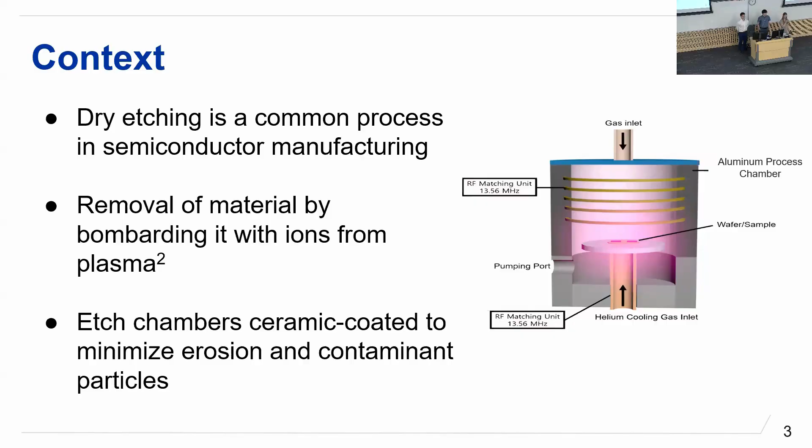A little bit of context: we're investigating coatings for the interior of dry etch chambers, and dry etching is a common process in semiconductor manufacturing that involves the removal of material by bombarding it with ions from plasma. These etch chambers are often ceramic coated to minimize erosion and the production of contaminant particles that can damage the wafers inside.

A common material being used today in these dry etch chambers is yttria. When yttria reacts with a fluorine-based plasma in these chambers, it creates a thin YOF layer, or yttrium oxyfluoride. With this interaction, YOF particles will fall off the coating and can contaminate the wafer inside, which is not desirable when you have these multi-billion dollar industries that rely on these wafers. So looking at a different perspective, we look at YOF as the coating itself. Since it already has fluorine in the system, it's more resistant to the fluorine plasma, and as a result produces fewer contaminants onto the wafers.

So how the process works is, let me use the pointer here so people on Zoom can see. Yeah, I think that works.

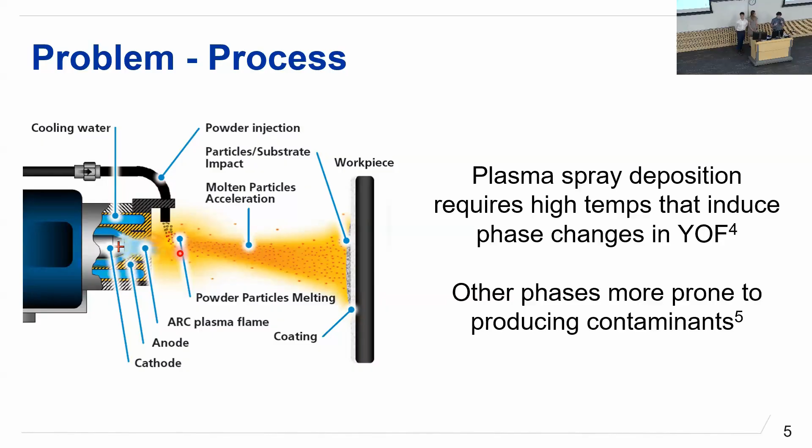So how this process works is that the current process today being used is plasma spray deposition. As yttrium particles are accelerated or injected into this plasma arc, it is then molten and hit onto the substrate, and then this solidifies and densifies onto the substrate. The issue with YOF is that this process is about 14,000 Kelvin, which is above the temperature for YOF, so it induces phase changes, and these phase changes are less desirable than just using yttria. So to actually use YOF, we have to look at a different process entirely.

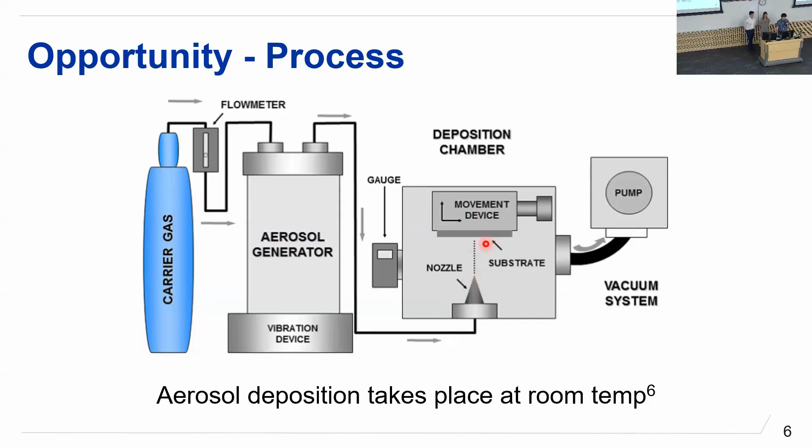This process that we use is called aerosol deposition, and it takes place at room temperature, so there should be no phase changes present. How it works is that a carrier gas, for us nitrogen, goes into where our powder is and aerosolizes our powder. That aerosolized powder is then accelerated, focused at the nozzle, and accelerated towards the substrate as the substrate moves on the XY axis and is programmable.

So how the process actually works is as the particle is accelerated at the substrate, as it hits the substrate, it will then hit and make this anchor layer by fracturing the moment it hits the substrate. Through this, it creates this anchor layer that's very dense and cohesive. Then as continual deposition occurs, it slowly creates a less dense layer, but it is still very cohesive.

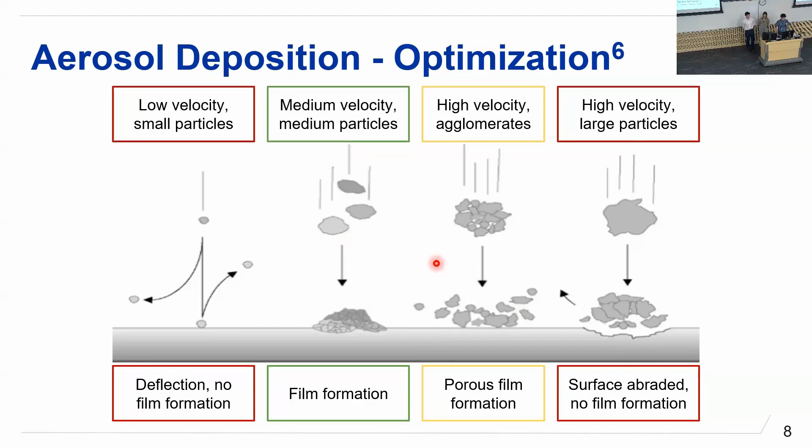What we want to see is right here, this green, where we have a medium velocity or medium particles. As the particles are accelerated towards the substrate, they hit, fracture, and densify on top of itself. If we have too high velocity or agglomerates, as they hit, they'll spread out more and create a more porous structure, which is not desirable for a protective coating. Too high velocity or large particles will just start to sandblast or abrade the surface, and no film will be deposited. On the other side, too low velocity or smaller particles, no film will actually be deposited onto the substrate.

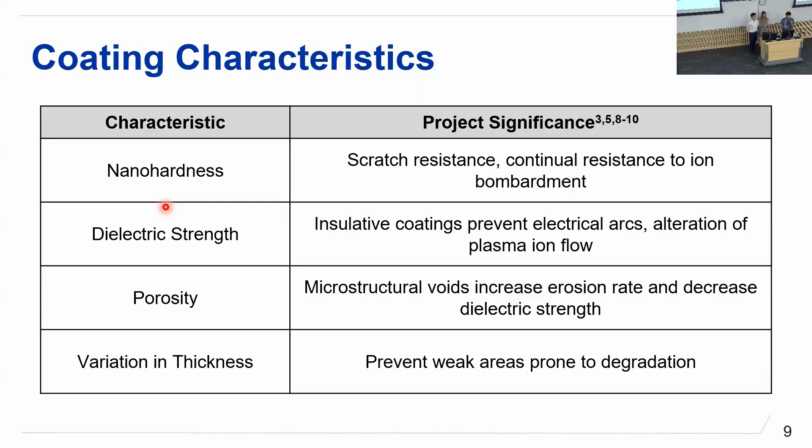The characteristics we want to look at are nanohardness, to see scratch resistance and resistance to ion bombardment, and dielectric strength, since in these dry etch chambers they have plasma ion flow, so we want to make sure it's electrically insulative to prevent electrical arcs occurring. As well as porosity, as I mentioned earlier, we want low porosity to have that green column, because porosity increases the erosion rate as well as decreases the dielectric strength, as well as having low variation in thickness, due to us wanting an even layer, being able to protect the material all the way across and having no weak points.

As Sam mentioned, NextEdge did sponsor a project last year, and so we're using that as a baseline, especially with their powder methodology. What we did, or what they did that we're using, is take the powder, ball mill it to reduce the particle size, separate using a sieve, and then bake out any moisture in the particles through the oven.

To begin the technical approach, we've made a roadmap to give some context. Firstly, we used DOE to create and implement our experimental plan to actually do the experiments. Secondly, we tested the responses of each experiment using various methodology. And thirdly and finally, we analyzed these responses to determine an optimized recipe.

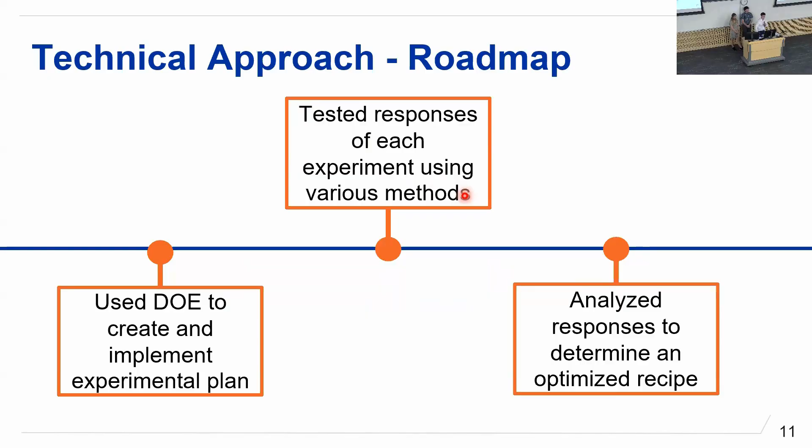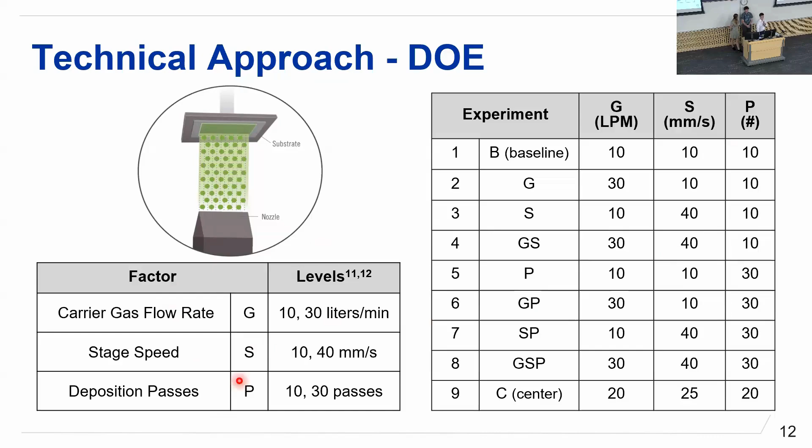So firstly, the DOE. We have a three-factor, two-level experiment where the first factor is carrier gas flow, represented by G in the table on the right. We had a low level of 10 liters per minute and a high level of 30 liters per minute. The second factor was stage speed, represented by S, with a low level of 10 millimeters per second and a high level of 40 millimeters per second. And thirdly, we had the factor of deposition passes, represented by P, which had a low level of 10 passes and a high level of 30 passes.

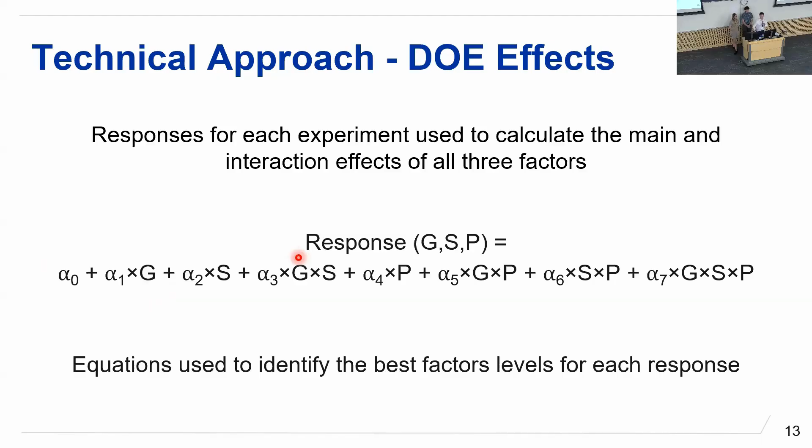So these effects - below is the really nasty looking equation. That is our general equation where we used our calculated responses to back out the effects, represented by alpha. We have 8 different effects. This is kind of just the under the hood of the DOE and what we actually did to develop and get our values.

So our responses that Connor laid the foundation on. To test nanohardness, we decided to do nano indentation through INL using a Berkovich diamond tip. Secondly, we tested the dielectric strength of the material using breakdown voltage testing to the ASTM standard D149-20. Thirdly, we tested the porosity of each spray or each experiment with a cross-sectional SEM image to the ASTM standard E2109-01. And finally, we tested the variation in thickness with the same cross-sectional SEM to the ASTM standard B487-24.

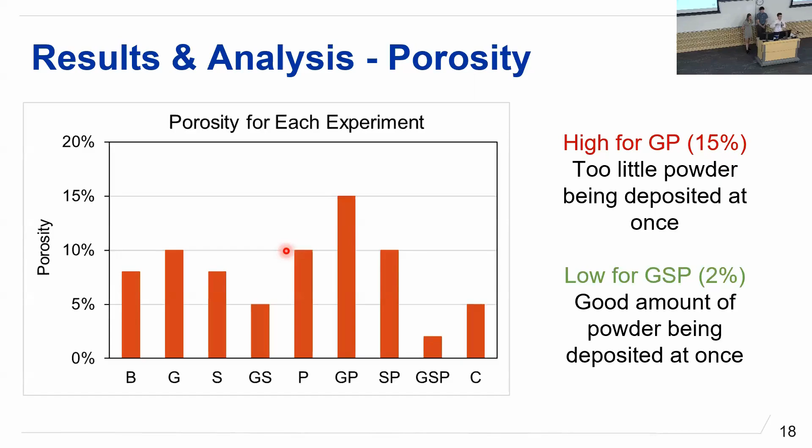Next, we have our porosity measurements. We found a very high porosity for experiment GP, and we attributed this to the fact that there was not enough powder being deposited at once. There wasn't enough exposure on any given area of substrate at some time, so it couldn't condense. We had a very low porosity for the same experiment GSP, and we found that there was enough exposure of the substrate to the nozzle so that the powder could condense and form that anchor layer.

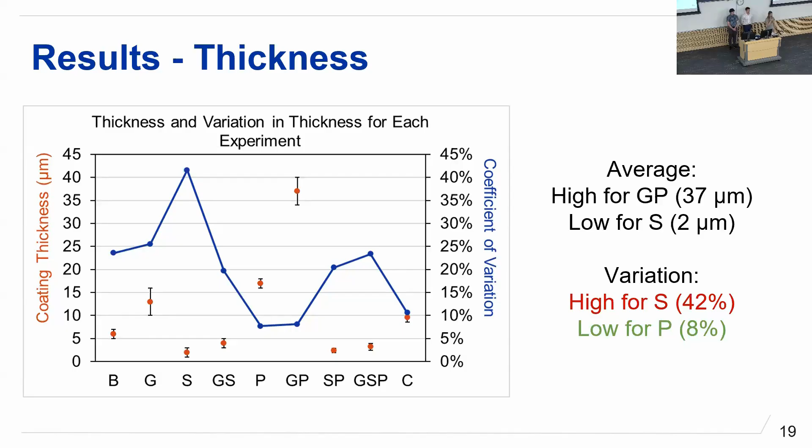We were also interested in the thickness of the coating. In the graph, the overall thickness with the standard deviation is represented by the orange dots, and the coefficient of variation is represented by the blue lines. We found that the coating with the highest thickness was for high gas flow rate and high passes, and the coating with the lowest thickness was for high stage speed. For variation, the highest was for stage speed, and it was lowest for the high number of deposition passes.

A little bit of analysis on this. We attributed the high thickness for the high gas flow rate and passes to a high enough particle velocity that adhesion is encouraged, and there are enough layers applied onto the coating that it levels out and makes it thick. We attributed the low thickness for high stage speed due to the small amount of powder being deposited on each area at one time per pass.

For variation in thickness, we attributed the high variation for stage speed to only the anchor layer being present, and the anchor layer tends to be uneven because as the particles hit the metal, it plastically deforms the metal as the particles fracture, making the surface uneven. We attributed the low variation in thickness for the high passes to the fact that as more layers are deposited on the substrate, it fills in voids on the surface to level out the coating.

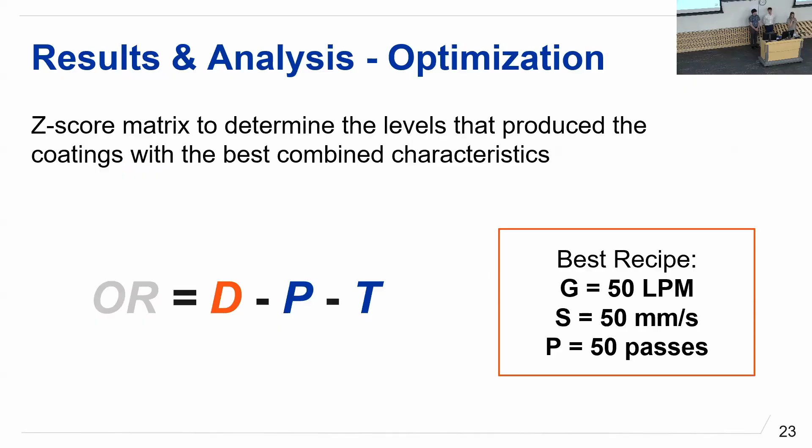So we wanted to optimize this recipe not just for each individual response, but also for the coating as a whole. We created a z-score matrix using these DOE parameters to determine the levels that produce the coatings with the best combined characteristics. We input those z-scores into the metrics shown below and determined that the best recipe was when gas flow was 50 liters per minute, stage speed was 50 millimeters per second, and the number of deposition passes was 50.

So a little bit of discussion. There were some errors in some of our methodology that we could have introduced. For breakdown voltage testing, we were only able to test one sample because breakdown voltage testing is a destructive process, so we couldn't actually test one coating multiple times. It's also known that the approximate dielectric strength of YOF should be around 25 kilovolts per millimeter, and some of the values we got were much higher than that, so there was something with our method that probably introduced some error.

For our SEM imaging, we also only cross-sectioned one sample, so there was not a lot of replicates there. For porosity, we only analyzed one cross-section per image, so it wasn't very representative of the whole sample.

We were not able to receive our nanohardness data in time for this presentation due to scheduling conflicts with our contact at INL, but that should be coming next week. And for the aerosol deposition equipment, there were some inconsistencies introduced if the nozzle was clogged or anything like that that we didn't notice when we were spraying, so sometimes the data we collected wasn't representative of just the factors we were changing, but other effects as well.

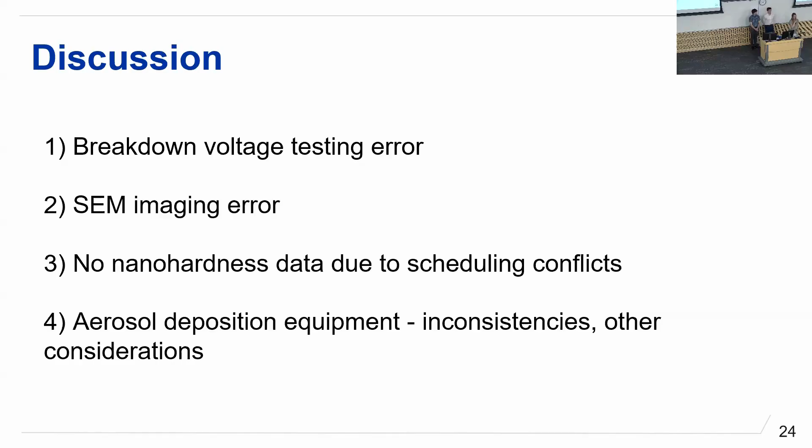We would also want to take into account some time and material cost considerations when determining an optimized recipe. For example, high passes takes more time, so that might not be worth it for the amount of dielectric strength they could introduce.

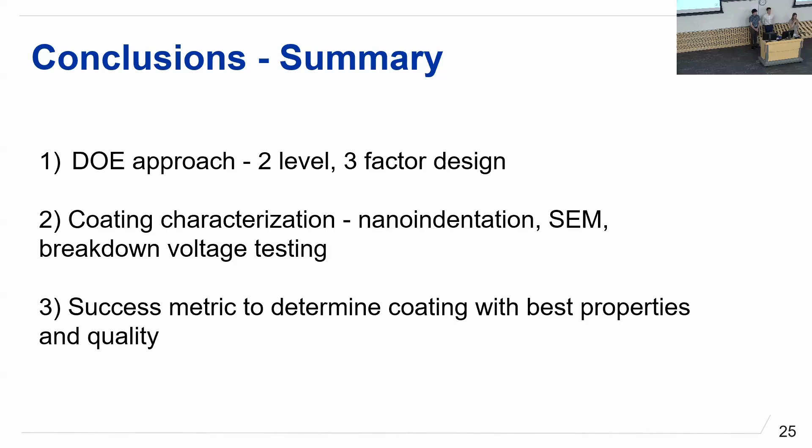So in conclusion, a summary of our project: we took a DOE approach with a 2-level 3-factor design to understand how 3 separate parameters affected an aerosol deposition process. We characterized the coatings produced using nano indentation, SEM, and breakdown voltage testing, and we input these values for the characterization into a success metric to determine the coating with the best properties and quality.

There are several directions we could take for future work. One would be to expand our DOE, test more levels to see if there are different effects that we didn't analyze. Other factors of interest include standoff distance, carrier gas species, and impact angle. Other responses of interest could be surface roughness or the etch rate of the coating in a fluorine environment.

We would also want to improve our SEM analysis, likely using image processing software to quantify our porosity rather than our eyes. We could carbon coat our sample before embedding it in resin, or use a conductive resin to improve the quality of our images. We'd also want to do powder particle size analysis to ensure that the particles we're using by our methodology are the correct size for this process.

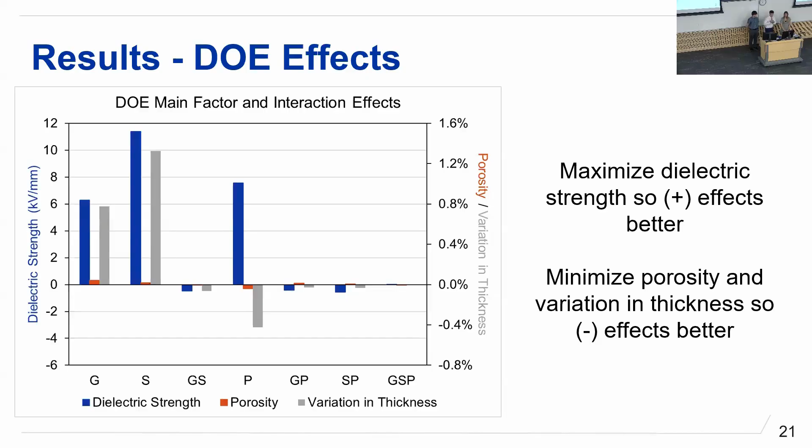Great presentation, guys. I may have missed this, but what were you looking for specifically qualitatively with some of your imaging, like the SEM? So the ASTM standard we used was actually a qualitative analysis of one image, which was the ASTM standard versus our image. So that's what was being referenced as the qualitative part, using our eyes. It's a visual ASTM standard, so it's not the most scientific, but it is an ASTM standard that we follow. Cool, yeah, I was just curious. Thank you.

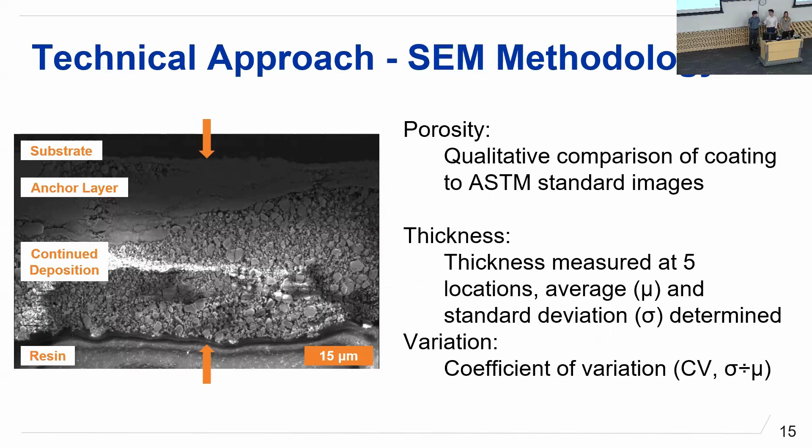All right, good job guys. Quick question: were all your coatings the same thickness? No, our coatings did have a variation in thickness throughout. That's just due to the different amount of passes resulting in different thickness between the different samples. Do you think it would be worthwhile to normalize some of your results based on coating thickness? I think that would be something great to look into. That definitely could give us more accurate data for selecting the best overall coating, but that was just something we didn't end up looking at. That's a great idea because we didn't consider that.

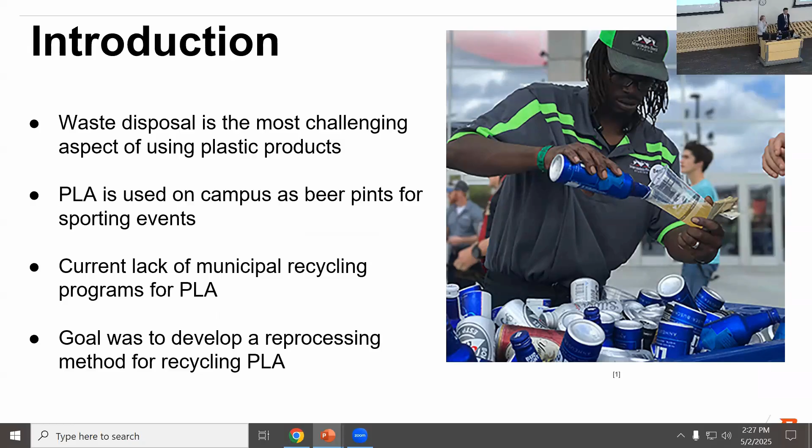A little bit of background on PLA: it starts by being synthesized through the fermentation of plant starch to form lactic acid. In the States, it's most commonly corn. In other areas like Southeast Asia, sugar cane gets you your most abundant yield.

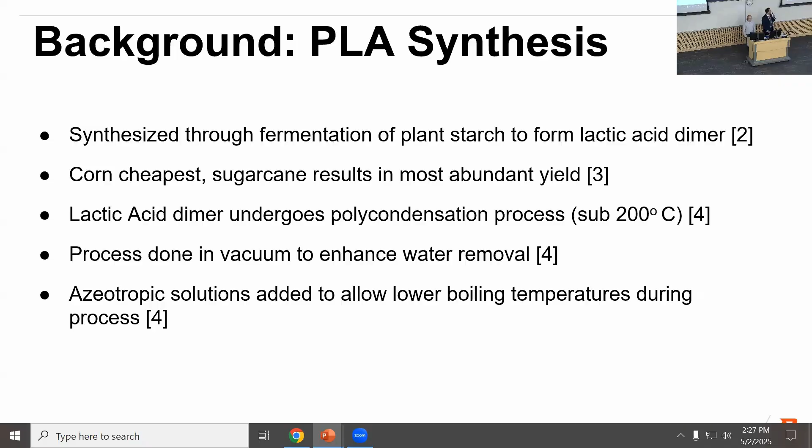This lactic acid dimer then undergoes a polycondensation process at temperatures below 200 degrees Celsius. This is also done with the presence of an azeotrope and in a vacuum, both of which further enhance the water removal.

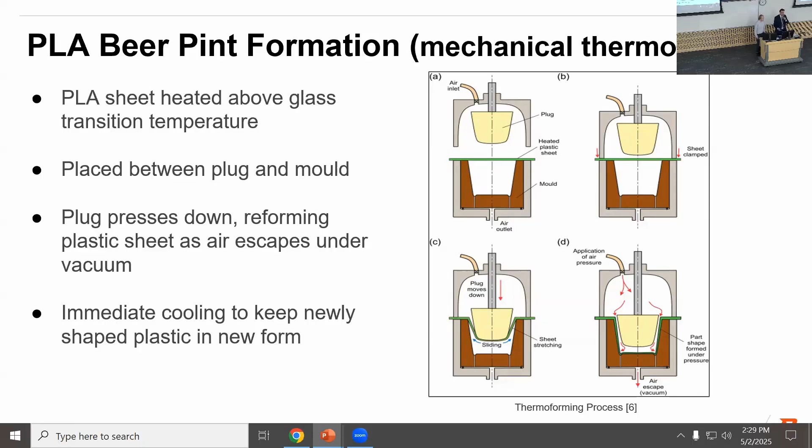The actual beer pints you've probably seen at Extra Mile Arena before are formed with a process called mechanical thermoforming. A sheet of PLA is taken above its glass transition temperature, placed between a plug and a mold part, and then the plug goes down as air is released to allow for cooling and solidification of this heated PLA in the newly formed pint mold. It's immediately sectioned off through machinery to mass produce it.

Plastic extrusion was the name of the game for our project. We dealt a lot with it, and I'm just going to take you through some of the basics. It starts by taking plastic feedstock and putting it into a hopper, and then a screw on the bottom pushes the plastic through a series of heaters.

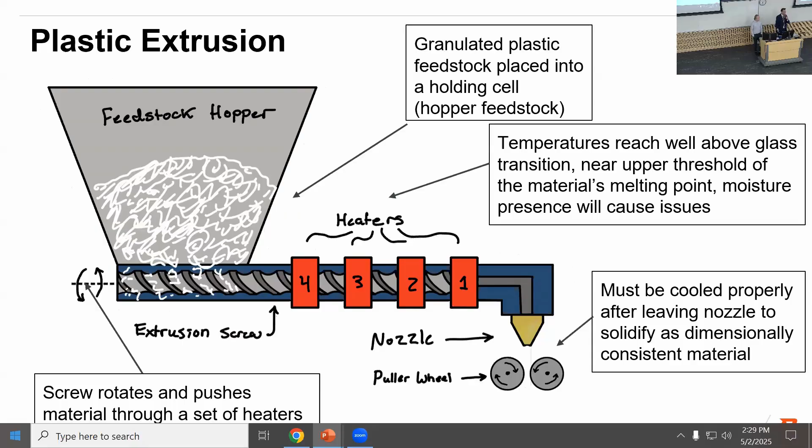These heaters must take the material above the glass transition and to the upper threshold of the melting temperature, so it's in a molten state. This is a part where you really do not want any excess moisture, as any moisture will likely boil, pop, and cause the integrity of your filament to be weakened. On top of this, there must be a proper cooling method between the extrusion at the nozzle and the pull wheel so that it's not flattened by the pull wheel when it gets there.

PLA has really beneficial properties for making it easy to extrude. It was compared with ABS, PET, and PETG, three other common thermoplastics used for 3D printing. The melting point, processing temp, and extrusion temperature for PLA are lower than all of them, which is good for how easy it is to extrude. It takes less time to heat up your extruder and is just more energy efficient.

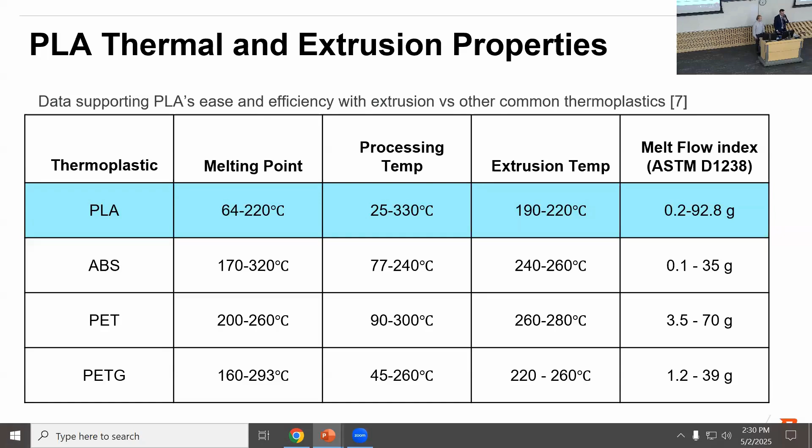On top of that, it has a much higher melt flow index than these other thermoplastics. This essentially means you can get a lot more weight of this polymer extruded in a shorter amount of time, more energy efficient for us, which is the name of the game. Unfortunately, it does also have some negative aspects, specifically with water content. It has the ability to uptake up to 2.4% water, and it has a resting equilibrium moisture content up to 2%. Both of these values are double the next closest one, so PLA does struggle in this regard.

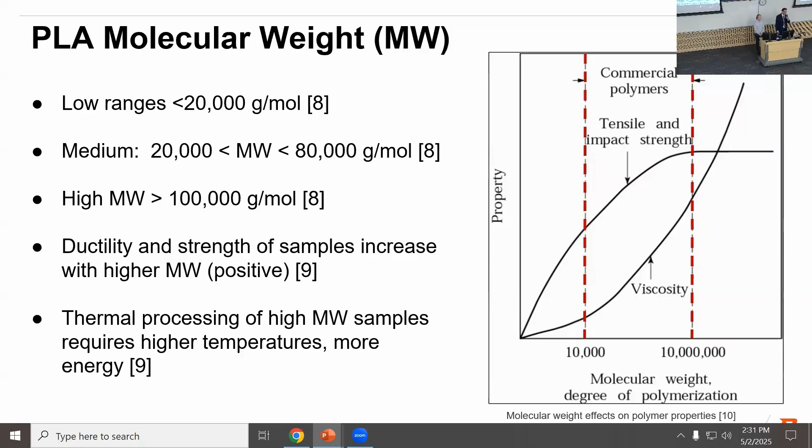It also has a very large range of molecular weight, with lower weight samples being below 20,000 grams per mole and higher ones well exceeding 100,000 grams per mole. This means there's a wide range of temperatures that can be worked with and a large range of mechanical properties it will take. The higher the molecular weight, the stronger it usually is, the longer the polymer chains, meaning more bonds that need to be broken in order to be deformed or impacted. So that is a good thing, but unfortunately, it also means it must be worked with at a higher temperature in order to properly get it into a molten state.

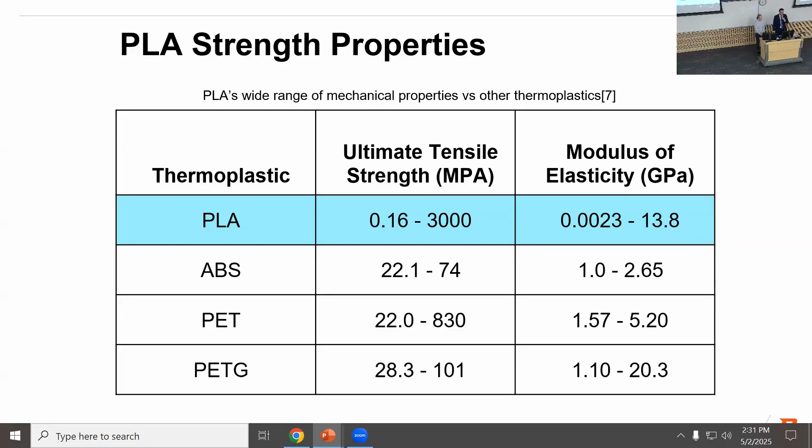This can be seen by this graph right here. The ultimate tensile strengths for PLA show a very wide range - 0.16 to 3,000 is more than triple the next closest range. And the modulus of elasticity is also a lot larger, with the exception of PETG being somewhat comparable.

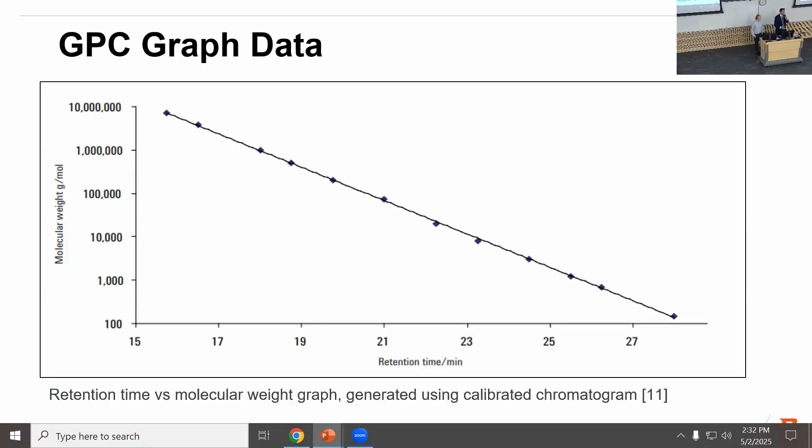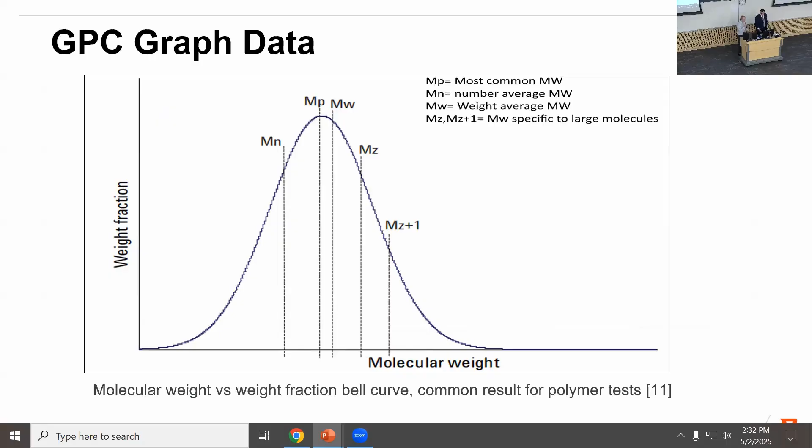This figure is a very idealized version. It's usually not going to be this linear, but you should see a negative correlation between retention time and molecular weight, with the highest retention times being the smallest molecular weights of the sample. So basically you would expect a normal distribution similar to this, which can tell you how many of what size molecular weight is part of your plastic.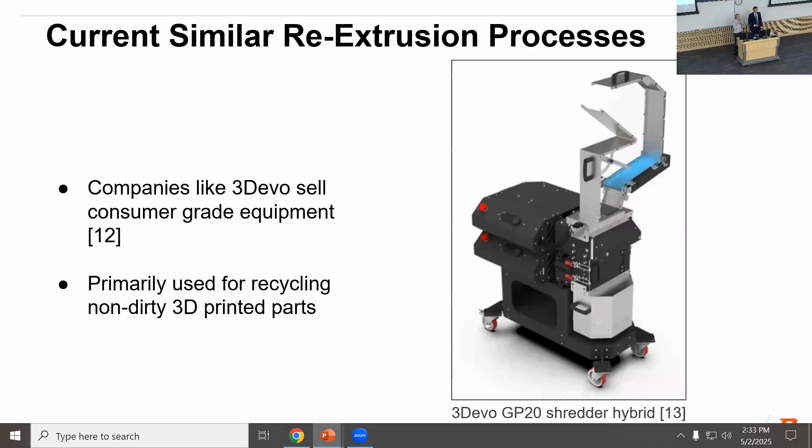Some current similar re-extrusion processes that are out there are done by companies like 3D Evo or 3Devo, I don't know how to pronounce it. They sell equipment like shredders, granulators, and extruders that are consumer grade, so people can do this at home. The difference though is that they are typically recycling old 3D printed parts or broken parts, not this thin plastic cup material that we're working with.

So our goal is to establish a repeatable process to produce this quality 3D printing filament from those cups. This starts by acquiring our material, sectioning it into smaller pieces, shredding, granulating, and then finally extruding it into a filament. Once we have that filament, we're able to produce some 3D printed parts, and we can mechanically test the filament and the parts.

For acquiring the material, we got in contact with Extra Mile Arena, a team over there called Pints to Prints. They donated some PLA beer cups for us to use. That's the picture on the left or on the right there. It's kind of dirty cups.

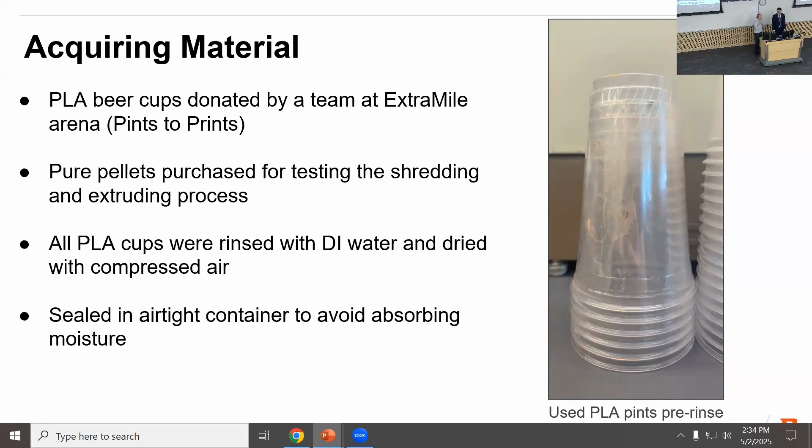We also purchased some pure PLA pellets called Eolas brand pellets online. We used that to test our shredding and extruding processes. All the cups that we received were washed with deionized water, no soap or anything, and dried with compressed air, and then finally stored in an airtight container so we can avoid moisture contamination.

So initially, we tried getting these section cups and placing them directly within the Filabot Reclaimer, which was the shredder that we used. Unfortunately, what we found was that the plastic cups were way too flexible and thin and just sort of gummed up around the teeth of the shredder and didn't process properly.

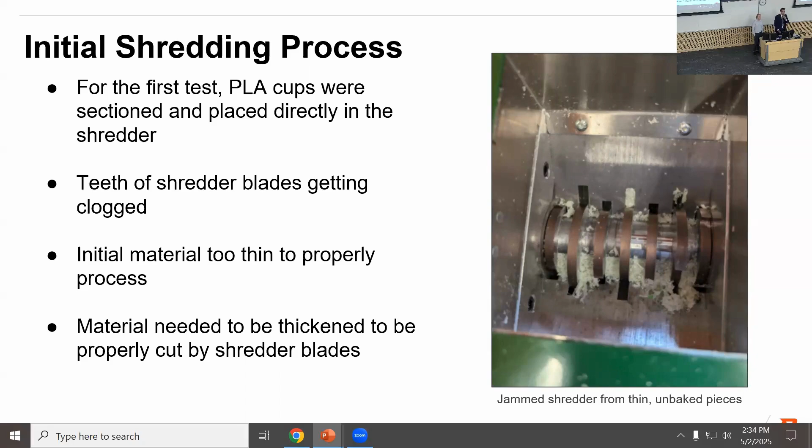So we knew that going forward, we would need to somehow treat this material to either embrittle it or harden it or just make it more able to be cut properly by the teeth. So we decided to research the benefits of thermally treating it. And what we wanted to do was essentially heat it up well above the glass transition temperature of PLA.

Now, when we do this, the amorphous regions of PLA, which is the majority of PLA, typically around 90% of PLA is amorphous, allows these regions to have the polymer chains untangle, and then upon cooling, as you can see in the graph, it becomes more solidified in a crystalline manner upon cooling. And that decreases the specific volume and consequently increases the hardness and brittleness.

And at the same time, it also lowers the moisture content, which, as we discussed earlier, is something you want to try to do.

So we applied this to our shredding and processing optimization by thermally treating our cups. After sectioning them into smaller pieces, we weighed out about 150 to 200 gram batches onto metal trays and baked them for 1 hour at 150 Celsius. They're weighed before and after so we can see how much water we lost.

And so this is the result of that. We found that the highest amount of water that all of our samples had was 1.45%, which is well within the industry standards for PLA, which goes between 0.01 all the way up to 2%.

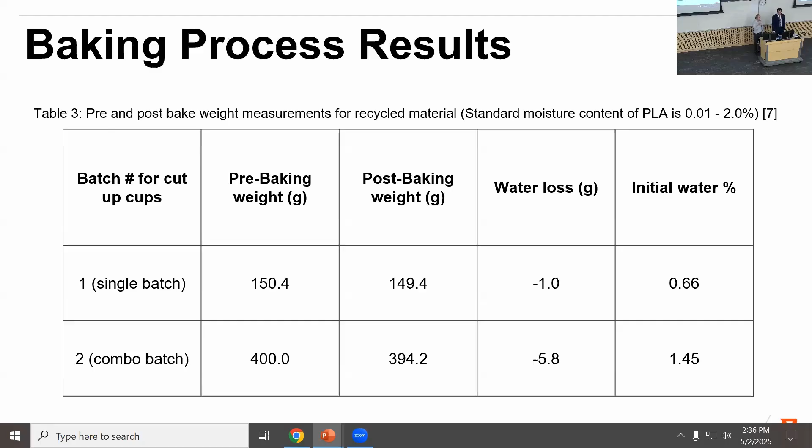So to start our extrusion process, we started with the purchased material that we got, the EOLAS filament, and we were using the Composer 350 made by 3Devo, as shown there. We used the default parameters that came with the machine for 1.75 millimeter filament.

This did not turn out super well. We had some non-uniform extrusion diameters and the filament was just unusable. To help us with this process, we downloaded software called Devovision that 3Devo offered, and this tracked the diameter of the filament in real time.

And once we did this, we set some higher and lower limits, about 1.8 to 1.7 millimeters. This was actually a stricter tolerance than the default for DevoVision when you first download it. So we allowed ourselves a bit of leeway if it went a little bit above or a little bit below.

And essentially, we just adjusted the heaters and the speeds of the screw and the puller to get to a point where we were consistently producing filament that was 1.75 millimeter diameter, and all the parameters were in check.

And going forward, this set of parameters was used for all the new waste material. This image that you can see on your right is about a 33-minute window of proper extrusion. So we spent a lot of time doing this, months trying to get all these parameters correct.

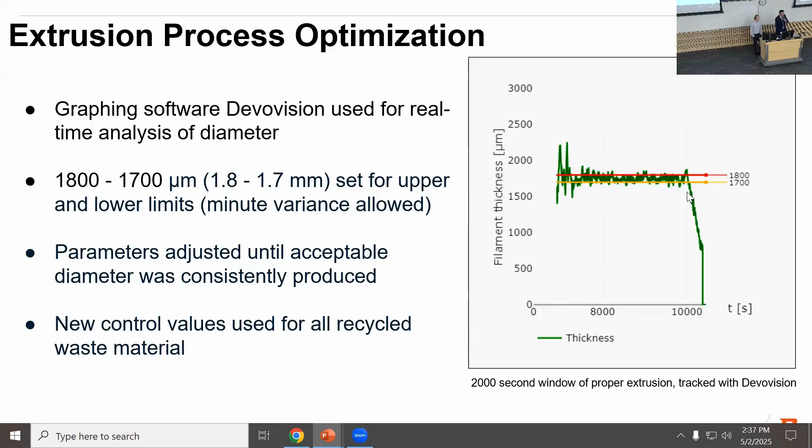There's also an extrusion screw that has a set RPM, or that we can determine. And then the puller wheels at the end, those are able to be set as well.

So the main thing that we changed, though, was the temperatures, as we found that the material was just not melting very well. So we decided to go up to about 200 degrees, closer to the actual nozzle.

So once we were able to finally produce some filament that was within the diameter that we wanted, we created 5 samples of both the purchased material and our recycled material for tensile testing. We also 3D printed some specimens known as dog bones that are used for tensile testing. We did 5 of each of those in both materials.

And we used the ASTM D638-22 engineering standard for testing the polymers at a rate of 5 millimeters per minute.

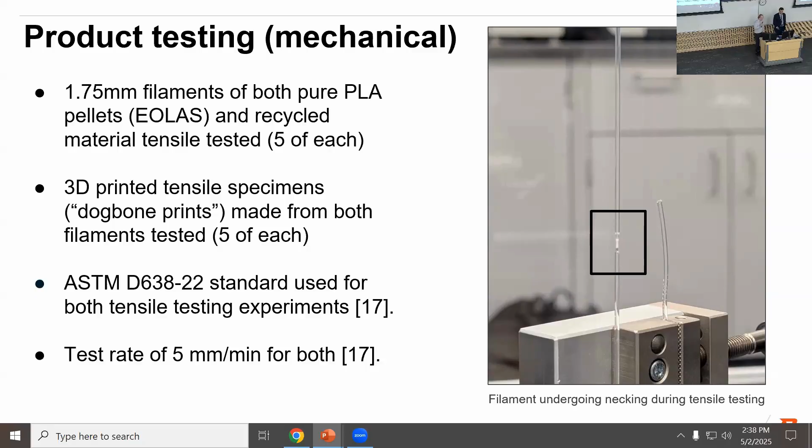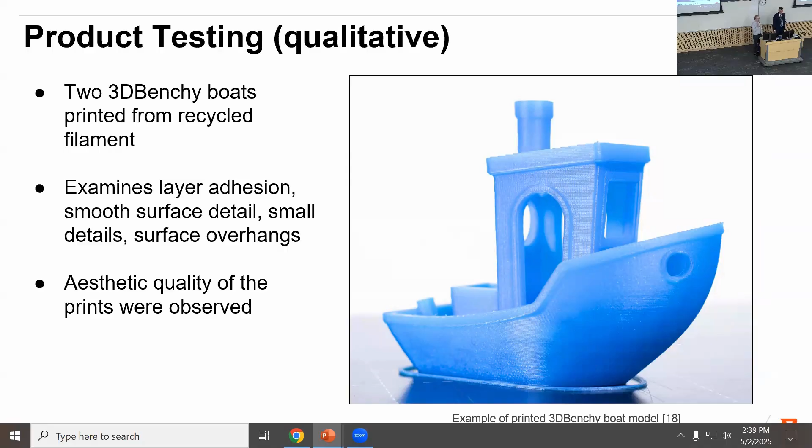So as for the qualitative analysis of our filament, we decided to go with this model of a 3D benchy boat. It's a little tugboat that has a lot of different details on it that are useful for examining things like overhangs, small holes, how smooth the surface is, and overall aesthetic qualities.

By calculating all of these values and individually charting them for the five, we were able to get an average and a standard deviation, just to see how strong they are and how consistent the data was. What we found was that in general for the dog bone, the highest standard deviation was 1.69, not that high, pretty consistent data. The recycled dog bones far outperformed the pure EOLAS pellet dog bones by over a magnitude of 2.

On top of that, the filament for the recycled material was also better than the pure EOLAS pellet filament, and it had a smaller standard deviation, meaning we were able to produce more consistent data. Our recycled filament, made from the beer pints, came in around 55 megapascals, slightly below the industry standard of 65 megapascals for 1.75 millimeter PLA filament available commercially. But our recycled filament could be used comparably with ASA filament and is stronger than PETG and ABS filament based on their standards.

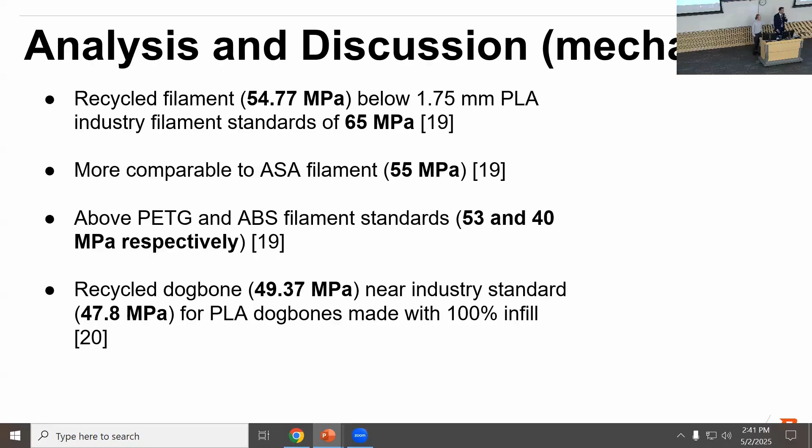I was able to clip that and print a second boat pretty much flawlessly, aside from a little bit of stringing. So yeah, that's very successful.

In conclusion, this PLA can definitely be recycled and repurposed into new products. It exceeds our expectations for strength and other properties, and it can be trusted to produce aesthetic parts. The only downside is that the material needs to be thermally treated before shredding to avoid clogging.

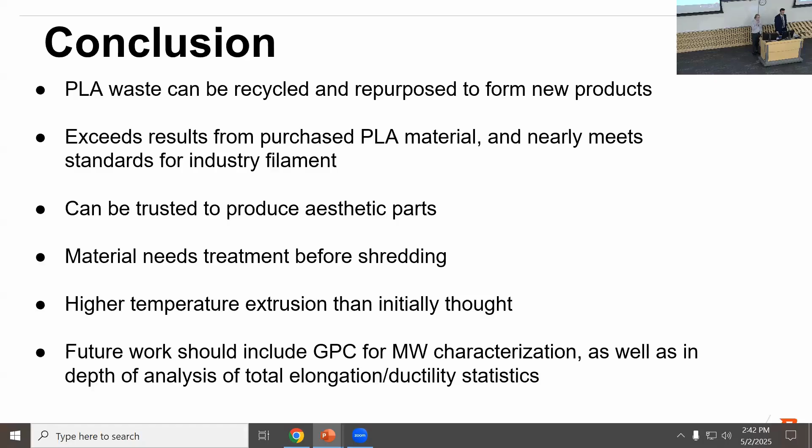For teams in the future hoping to do this project, we definitely recommend using the higher temperatures that we went with, as well as diving further into molecular weight characterization using GPC. We didn't have enough time in our project to cover that, but we would have liked to see those results, as well as a more in-depth analysis of the elongation and ductility of the materials.

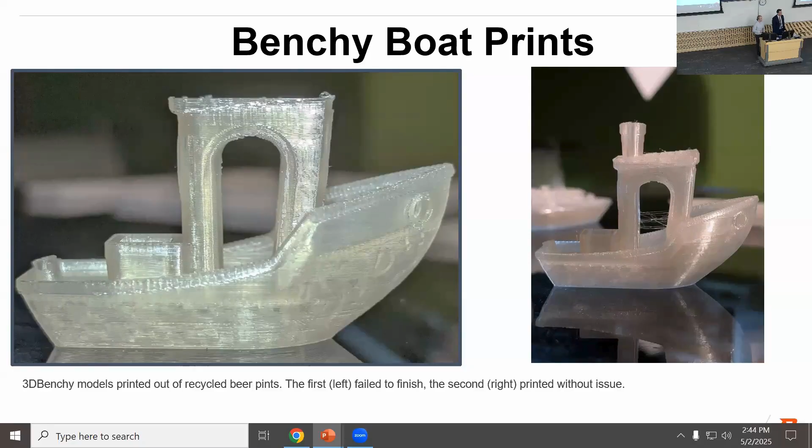So before putting the shredded pieces into the extruder, you did the thermal processing, heating it up and then cooling it down. The argument there is that by heating it up close to the melting temperature, after cooling down, we've got a crystalline polymer that's more brittle. Does it matter if you just cool it down enough? Can you process in a cold room, or how much did heating up and cooling down help with the processing?

It was required to embrittle the material. As far as heating it up, we started out knowing we wanted to exceed the glass transition. The 150 degrees Celsius was actually just the first number we went with, and it really worked for us. As far as cooling, we just let it sit over a duration of about a day. We typically worked with the materials a day after they finished baking. We didn't put them in an actual colder than room temperature environment.

Nice work, good job. It looks like you have hit all the standards and properties you would like to hit. When you think about this as a successful process, how does it compare on the economic side? Did you estimate how much it would cost to process and recycle this compared to anything new? So that's another thing, the cost analysis. I would recommend putting another team on that in the future. There's a lot that needs to be developed. The team at Extra Mile actually intends to get a larger shredder and a better extruder purely for these cups, so if they were to do that, there'd be quite a big budget for that. But overall, processing the material wouldn't be super expensive, I would think.

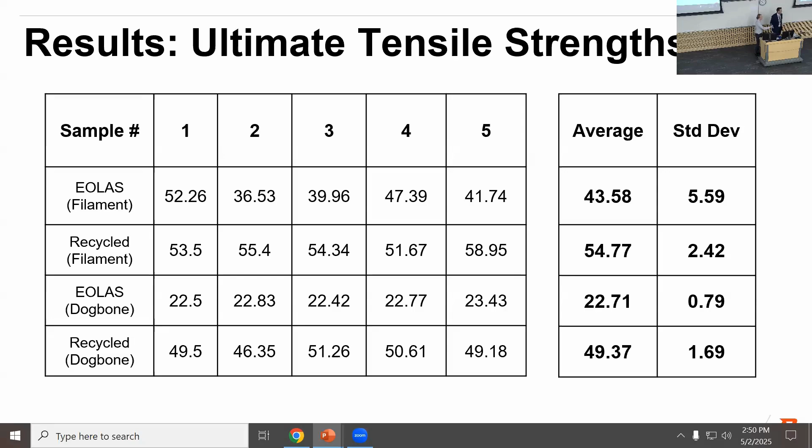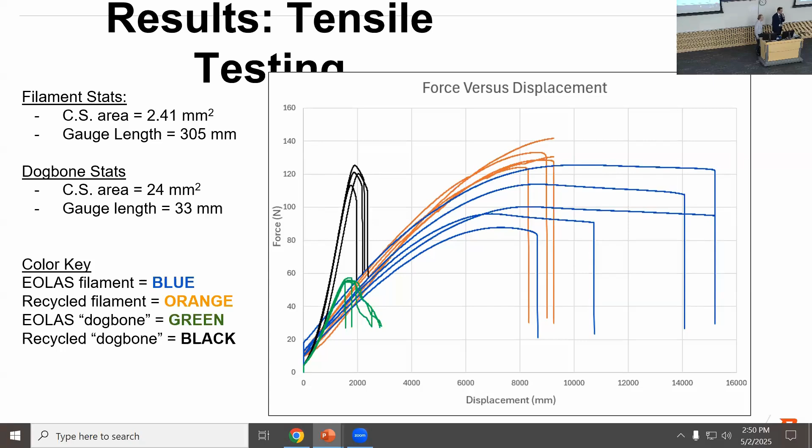Our project was determining gas behavior in ultra-high vacuum environments for atomic layer deposition applications. Our sponsor was Micron Technology, a major company within the semiconductor industry known for their computer memory and data storage solutions. Our sponsor from Micron was Dan Markowitz, who is an MTS pathfinding lead in Micron's corporate labs. Our faculty advisor was Dr. Stephen Hughes, who is a Cohen affiliate faculty, meaning he supports research here at Boise State while also corresponding with teams over at Micron.

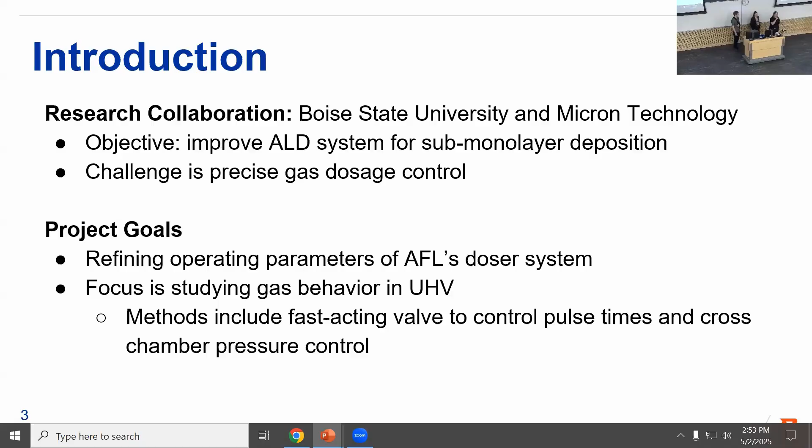Our project stems from a research collaboration between Boise State University's Atomic Films Lab and Micron Technology. The overall objective was to improve the current ALD system in the AFL for submonolayer deposition. The challenge with this was precise gas dosage. Therefore, our main goal was to refine the operating parameters of the AFL's doser system by focusing on studying gas behavior in ultra-high vacuum environments. Some methods include using a fast-acting valve to control pulse time and controlling cross-chamber pressure.

So our project is more so looking to enable submonolayer ALD, which means an incomplete monolayer is formed on the surface of the substrate, as we can see in image A, compared to the fully deposited substrates in images B and C. Submonolayer ALD requires extremely small amounts of gas being inputted into the main chamber, which is why we were looking at ultra-high vacuum environments for this. It's important for research as it better reveals the reaction mechanisms behind ALD, allowing for better comparison to computational studies which involve one to few molecules interacting with a small portion of the substrate.

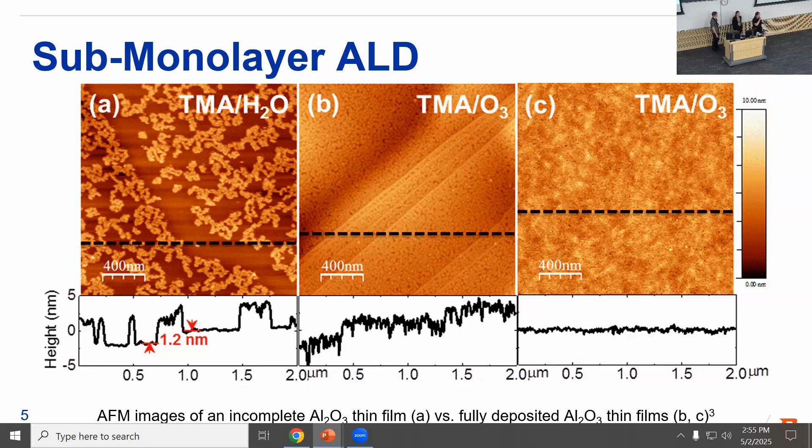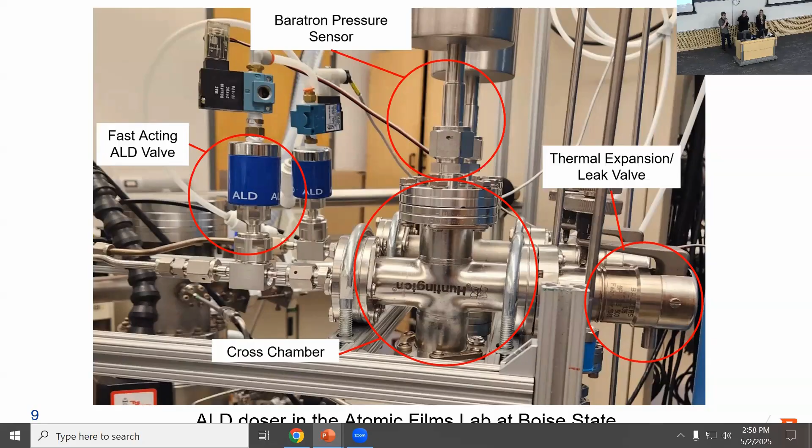So here's another schematic of our system. We've got the cross chamber and the main chamber. Before the cross chamber is filled with nitrogen, it is evacuated, so there's no air contaminating it—it's just pure nitrogen. This is in the millitorr range, so we can use the Baratron pressure sensor, which is an electromechanical system. Because we're not in ultra-high vacuum yet, we can use a much simpler pressure sensor.

But in the main chamber, this is ultra-high vacuum, so we use an RGA pressure sensor. This is a residual gas analyzer—basically just a small mass spectrometer. It ionizes the gas, then counts the number of nitrogen molecules based on their mass. So a small amount of that nitrogen will flow through the fast-acting ALD valve into the main system, and then we'll analyze the pressure difference.

So our whole process is based on these 2 operating parameters and how they affect the gas dosage. We have the pressure within the cross chamber, which we varied between 0.05 and 5 millitorr, based on the Baratron pressure sensor—this is the range that worked with it on top of that cross chamber.

We also have the ALD valve timing, or the pulse time, which we varied between 5 and 1,000 milliseconds. We went down to 5 milliseconds because that's the operating limit for the ALD valve we used—it can only open and close so quickly. Our original hypothesis was that as we got to that extremely low pulse time, reaching the limits of that valve, we would get low precision due to mechanical inconsistencies within the valve when it's nearing the limits of its specs.

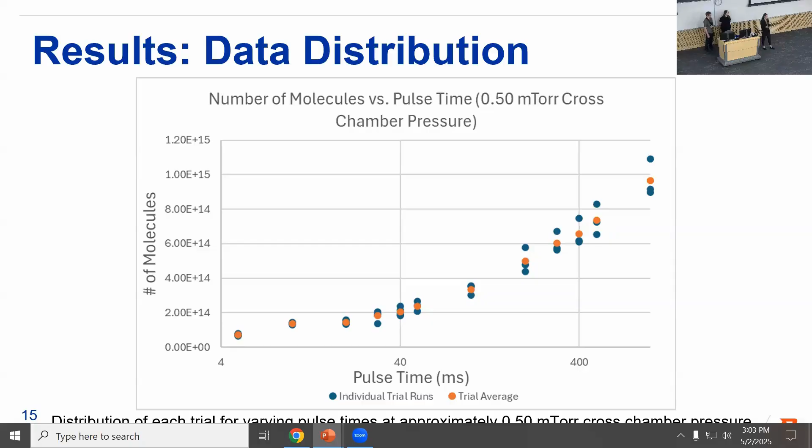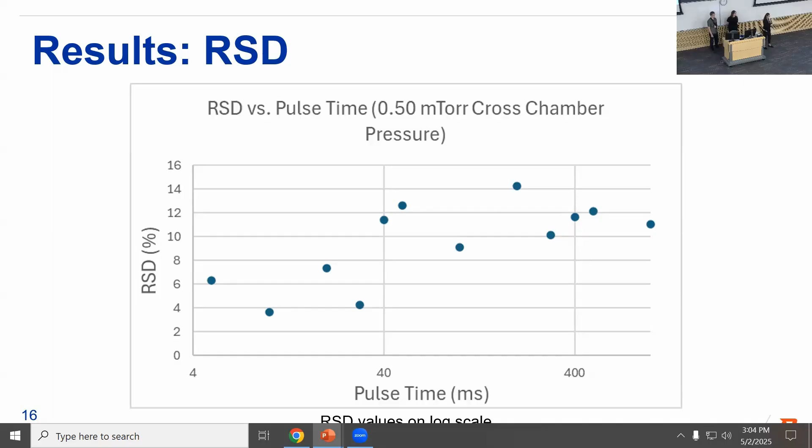I would also like to mention that we performed a Grubbs test to identify any outliers in our data. Throughout all the data sets, only the 30 millisecond data set identified a low outlier, and that data point was thrown out before we performed the statistics on it.

Here we have the relationship of pulse time versus number of molecules emitted. Initially, the number of molecules emitted rapidly increases, and then as pulse time continues to increase, the rate of increase in the number of molecules starts to slow down.

This variation in emission rate could be due to the efficiency of the pneumatic valves' opening and closing times, depending on the pulse time, or the fact that the gas behavior may be changing altogether.

As I earlier mentioned, the relationship between pulse time and the number of molecules emitted should be linear based on that precursor dosing equation. However, the data shows that in actual applications, the rate may not be perfectly linear.

Lastly, we have the impact of cross-chamber pressure on the number of molecules. As cross-chamber pressure increases, the number of molecules increases, which is good. This was predicted by the kinetic molecular theory.

However, unfortunately, due to time constraints, we were not able to gather the appropriate data that we could have run more statistics on and better analyze this relationship between cross-chamber pressure and the number of molecules emitted.

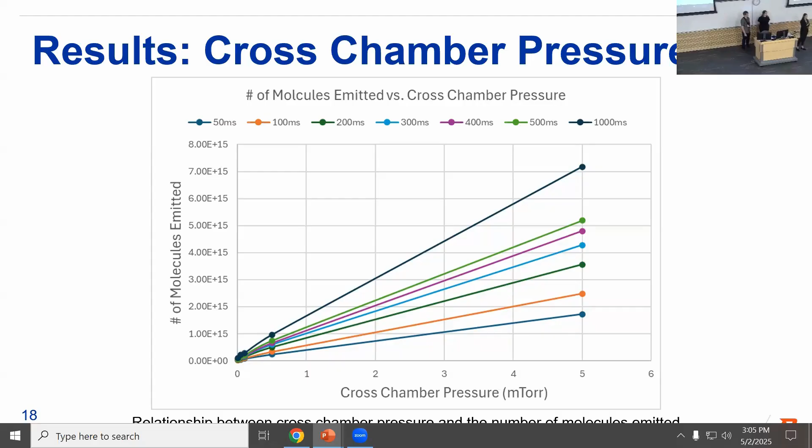I would also like to point out that throughout all of our data sets, there are crucial points missing from some of those center regions of our range. If we had had those, our results could have been more definitive.

Regarding that initial hypothesis that smaller pulse times would lead to lower precision, the data actually showed that the opposite was true. These smaller pulse times had the best precision.

We looked at the data for a while and came up with a new hypothesis: the reason the longer pulse times didn't have good precision was due to a change in pressure differential during the dosing. The cross chamber and the main chamber have different pressures, and there's a differential between them. This is what causes the gas to flow in the first place.

But as that ALD valve is left open for longer periods of time, this gives more time for the gas to equilibrate, and the pressure differential changes during the dosing. We've attributed that to a greater variation in the gas dosage at longer pulse times.

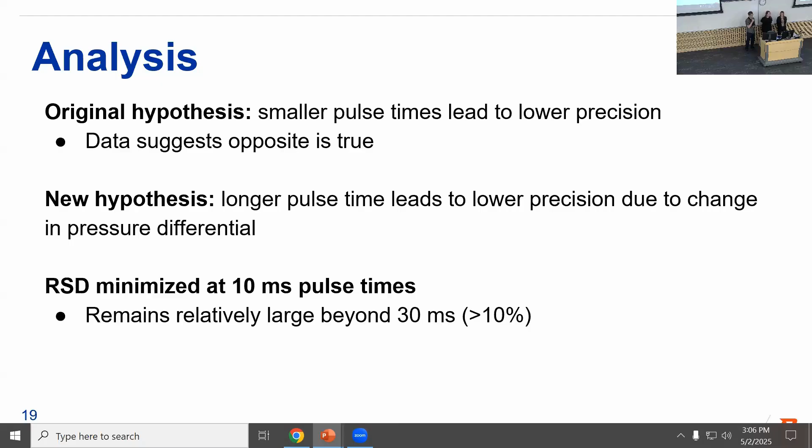As Sarah was showing, we have the RSD minimized at 10 milliseconds, and that was the greatest precision out of all of our tests.

Regarding these findings, this is actually quite promising for future submonolayer studies, as contrary to our expectations, the precision was not compromised at these low pulse times. This will allow us to do relatively consistent nanomolar doses at these 30 milliseconds and lower pulse times.

We also found that the cross-chamber pressure was significantly more impactful than pulse time on the gas dosage. For these submonolayer studies, that's good information to have, so they can really focus on that cross-chamber pressure when they're trying to get these nanomolar doses.

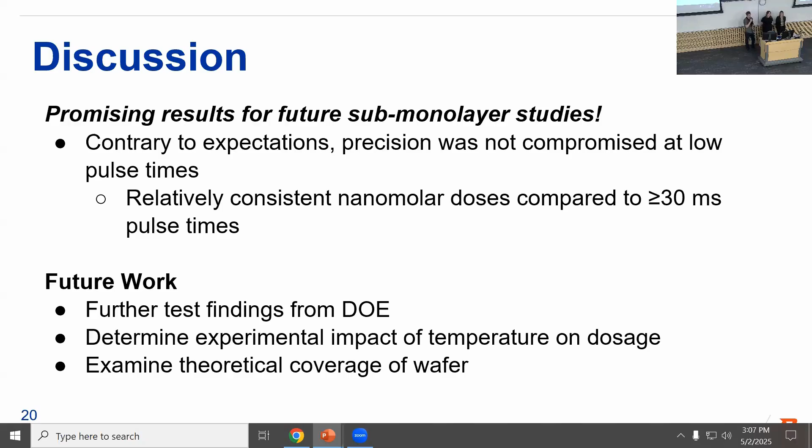For future work, we want to further test our findings with a more refined DOE. We also want to look at the experimental impact of temperature on the dosage, and then examine the theoretical coverage of a wafer, given that the wafer is some distance away from the orifice.

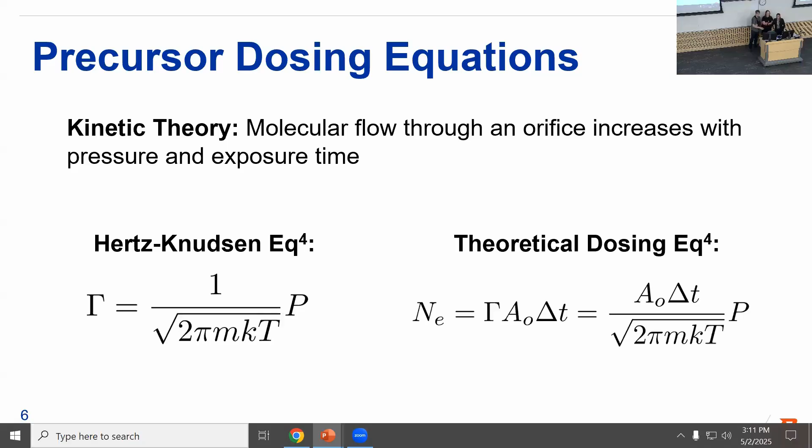Thanks, good presentation. I guess kind of like the question I asked this earlier group was, what's the most influential parameter, and then what's your biggest source of error? I know you had the error propagation equations that you used. What's your biggest contributor, and is that important - can we buy a better something to make that error less to improve our results?

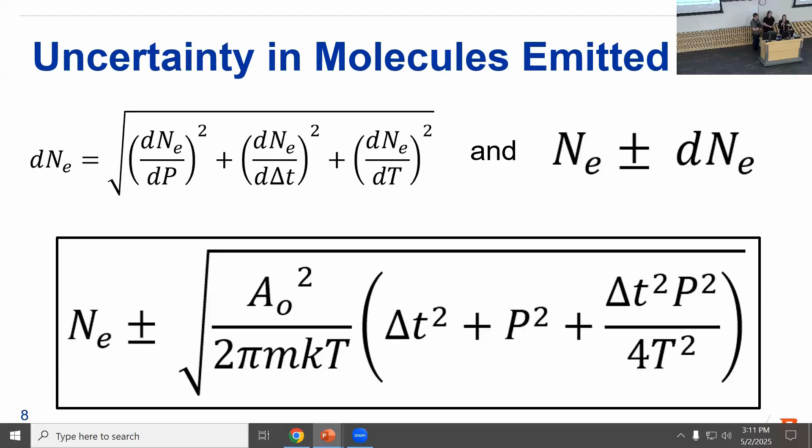Oh, buy a better something - I don't know what. Before you said that, what I was going to say is we actually did notice in our data that the base pressure in the main ultra high vacuum chamber, if that is slightly off, it does affect the number of molecules going into the system. So as far as our data goes and the error we might see, I do feel like that was a large contributor.

As far as pneumatic valves and things, we do have one of the better, very specific Swagelok ALD valves that are made precisely for this process. But if my team wants to add anything else...

According to our DOE, the most impactful parameter was cross-chamber pressure as well, but we were unable to further determine the variation within different cross-chamber pressures due to time constraints.

Nice presentation. It's an interesting observation that this gets more precise at shorter pulses, and your hypothesis that this is due to equilibration of the pressure difference. You could test this if you had not just changed the frequency of pulses - let's say do 5 millisecond pulses at different intervals, with a 5 or 10 millisecond gap in between, and repeat that. Did you think about doing this to test this hypothesis?

If I understand the question correctly - so we did our first run and noticed that some of our peaks were being affected because we were not leaving enough time between the doses. After analyzing that data set and realizing that, we started leaving exactly 15 seconds between each pulse that we allowed into the chamber. Does that answer your question? Sick.

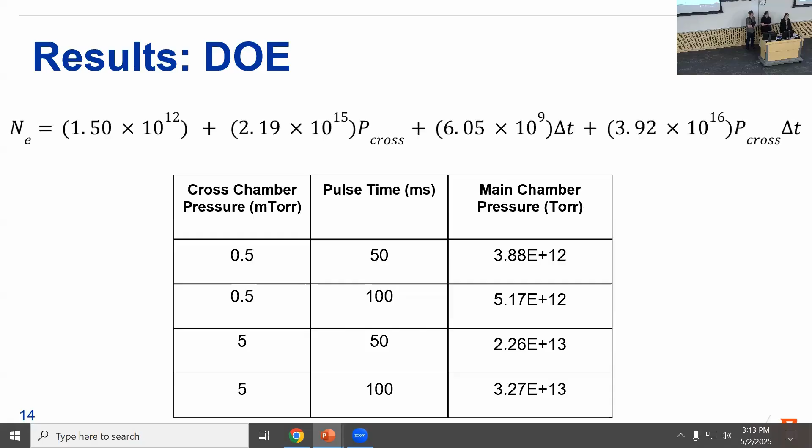Anyone else? Well, thank you.

Our final talk for the day is a project sponsored by INL.

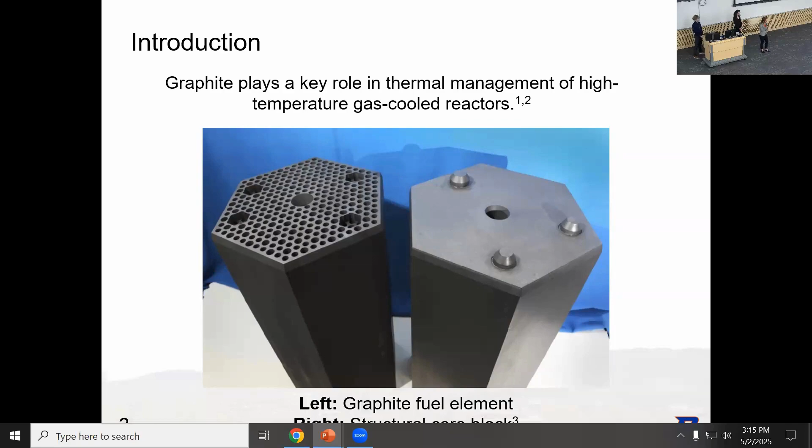The property associated with this is called thermal emissivity. The Idaho National Laboratory provided us 6 grades of nuclear graphite to study, and we were interested in 2 key areas of interest among these. The first was the microstructure, specifically grain size, and the second was oxidation.

We hypothesized that the more coarse grain graphite would result in higher emissivity due to increases in porosity, which would increase the surface area for higher emissivity.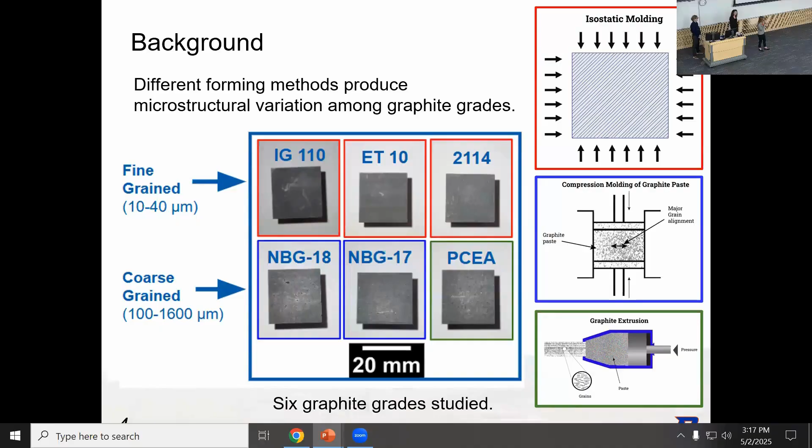The other area we were interested in was oxidation. Inside the nuclear reactor core, there can sometimes be minor air ingress, which, because high-temperature gas-cooled reactors operate up to 1,000 degrees Celsius, will oxidize the graphite, so we wanted insight into how that will impact the emissivity. So what is emissivity and why is it important?

As Sarah said, moderators in nuclear reactors are made of graphite because they have a very high emissivity, meaning they're able to transport heat very efficiently. Emissivity is a measurement of that efficiency, shown as the total emitted power of your material over the ideal emitted power of a black body. A black body has an emissivity value of 1, which is as good as it gets, and that's not realistic in the real world—I'll get into that in a bit.

The physical laws that govern emissivity have to do with radiation, such as the Stefan-Boltzmann law. This law shows that the total emitted power of a material will increase with the Stefan-Boltzmann constant sigma multiplied by the temperature to the 4th power—so very quickly with temperature. That is across all spectrums you're looking at.

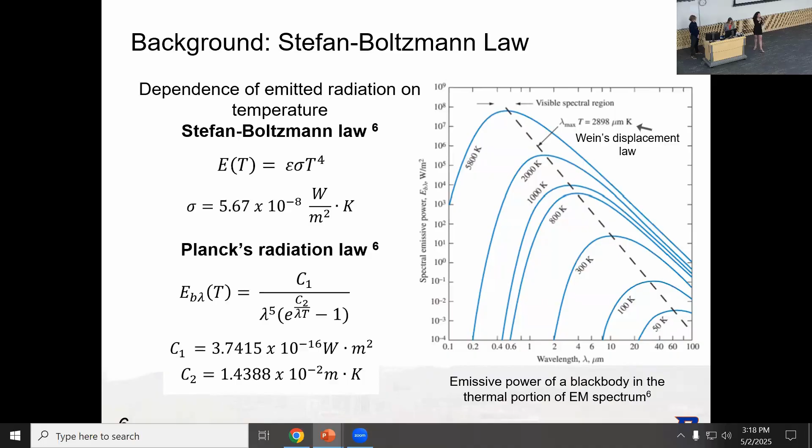But if you want to find total emitted power at a specific wavelength, you look at Planck's radiation law, where you can find the total emitted power at a specific point on the wavelength. If you want to find the point where the total emitted power peaks, you use Wien's displacement law. As you can see, at higher and higher temperatures, your wavelength shifts lower and lower to where the total emitted power is.

The factors that influence emissivity, as I said, are temperature and wavelength, but nothing is ever perfect—it's never actually one. Other factors include grain direction and isotropy, which is very understudied, and we wanted to address this in our study. Additionally, material composition matters: metals have very low emissivity, and non-metals have high emissivity, hence graphite.

Additionally, the angle of incidence that electromagnetic waves emit from your material, depending on the direction of your detector, will influence your emissivity measurement. Lastly, surface finish, conditions, and cleanliness are huge for emissivity. On the left here we have a very rough surface of graphite, i.e. maybe an oxidized sample. This will have higher emissivity because there are more cavities for incident electromagnetic radiation to absorb into the material.

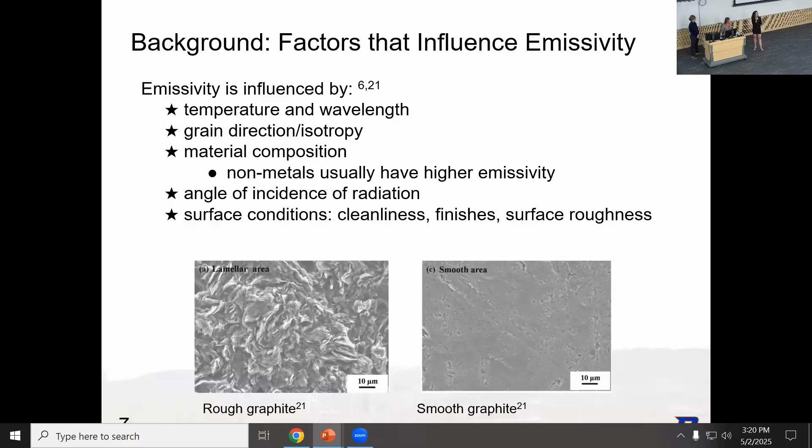Versus a smooth surface, you're going to have just one chance to hit the surface and absorb into it, so usually less emissivity.

Now, to measure emissivity, there are various ways to do it, but one of the simplest is using an IR pyrometer. The benefit of an IR pyrometer is it measures infrared radiation at just 8 to 14 microns in the spectrum. This is important because that is where atmospheric conditions are very, very minimal.

Additionally, a pyrometer works by having your object radiating emission, and the optics pick it up and the sensor transforms it into an electrical signal, which is calibrated in the pyrometer to a set temperature. So with that temperature, we're able to see the surface emission temperature being radiated.

In our setup, we have an implanted thermocouple, which Noah will get into in a second, inside our sample to see the total temperature that has been absorbed. So if you can see how much temperature is absorbed and how much is emitted, you can see the difference between the two, and the pyrometer can calculate your emissivity value.

Before we start getting into any part of the experimental setup, we first need our samples made. All of our samples were manufactured at the Idaho National Laboratory IRC complex in 1-inch cubes. There were two main reasons for choosing the cubic geometry.

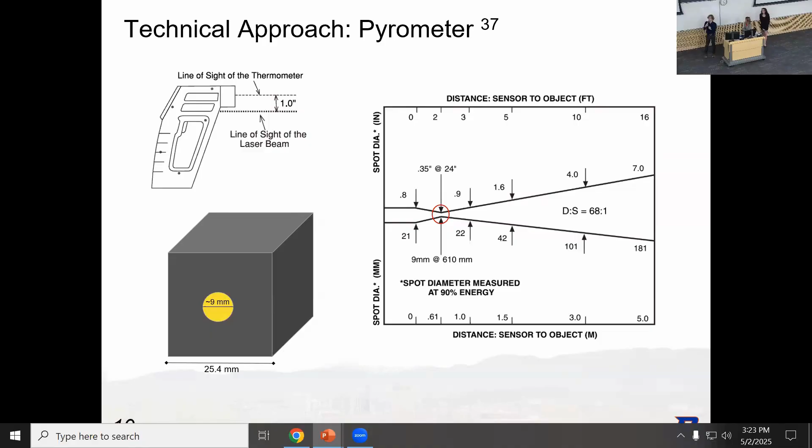This is a little cartoon that we showed last semester of what we predicted our experimental setup to look like, in which we have our graphite sample sitting in the center with an alumina plate supporting it to get it in that viewing distance.

On the right side, we have a custom end cap with our thermocouple in it to get the true temperature of the sample, as well as gas lines flowing argon through the system.

The reason we're using argon is graphite will oxidize around 400 to 500 degrees Celsius, so we want to make sure our graphite remains in the sample and we don't open it to find nothing at these elevated temperatures. A unique property of argon gas is that due to its monatomic structure,

it is incapable of absorbing the IR radiation. On the left side, we can see the IR pyrometer looking through a zinc selenide window into our sample. We chose zinc selenide because it has a constant transmission across the 8 to 14 micron wavelength window, which made our calculations much easier versus, as we saw on Lauren's slide, the high variations in some other transmittance curves.

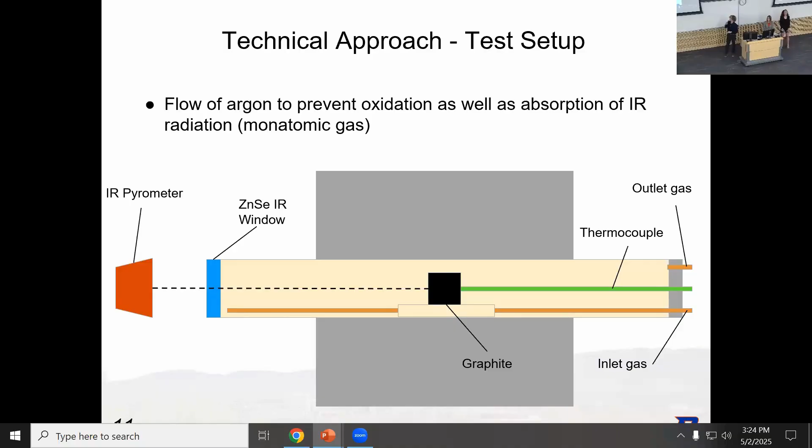Now, making this setup wasn't all sunshine and rainbows, as the viewport and this custom port took some time to manufacture. After consulting with the machine shop, we chose the best machinist in the building, Dr. Harold Ackler, to do all of our work. And we had Connor Berry from the EIS help weld all of our flanges.

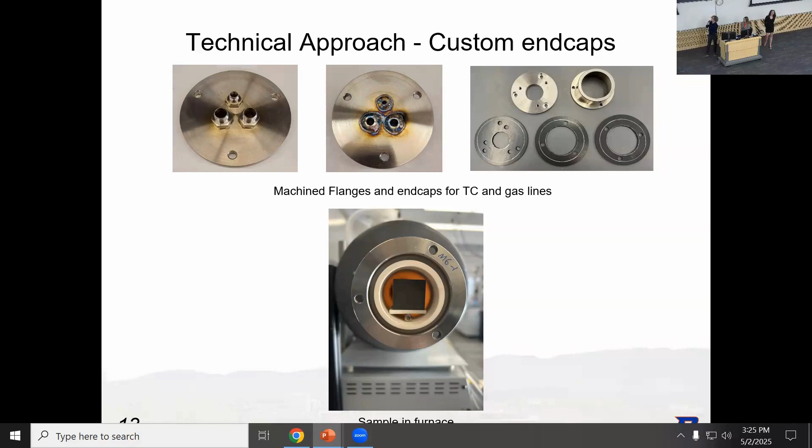So as we can see at the very top, our custom gas in, gas out, and thermocouple in port. And at the bottom, we can see where our zinc selenide window will attach to look into our graphite.

Now, with making a custom setup, we need to see any errors introduced into our system. We need to essentially validate our system. So there are some things that we need to address.

First, we need to understand any issues with our IR pyrometer beforehand by verifying it against a black body calibrator. Next, we need to understand how the transmission of the zinc selenide window will affect the results by introducing it between the pyrometer and the calibrator. And finally, we want to compare our Type K thermocouple that we purchased against a NIST calibrated Type K thermocouple, which was provided by the Advanced Materials Laboratory.

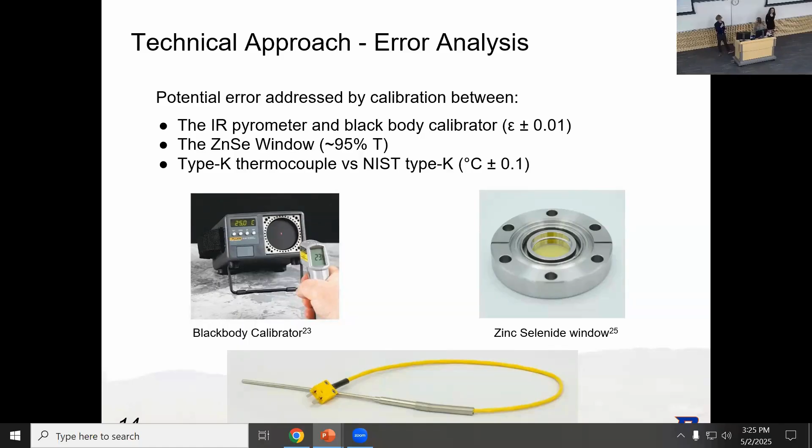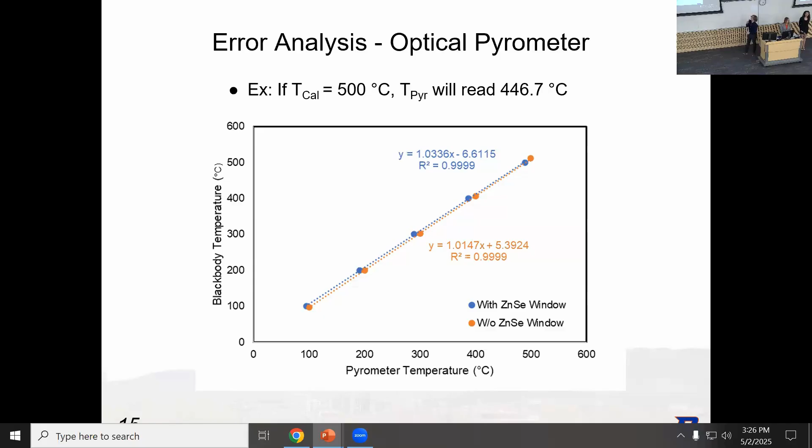So what we can see is there is a very significant difference in the sample temperature and the recorded sample temperature. For our black body calibrator, if the true temperature is set to 500 degrees Celsius, we will really only be recording around 447 degrees Celsius. So we did need to take this into account, and with this high R squared value, we were able to extrapolate this to the higher temperatures that we recorded at.

Earlier, I told you we were interested in 6 grades of nuclear graphite, but we narrowed the scope of our presentation to focus on the fine grain IG-110, formed via isostatic molding, and the coarse grain PCEA, formed by extrusion. In addition, we were delivered an IG-110 sample oxidized to 5% mass loss and a PCEA sample oxidized to 2% mass loss. We didn't have 5% for the PCEA because it took a lot slower to oxidize at 500 C, and that's what we got from our sponsor.

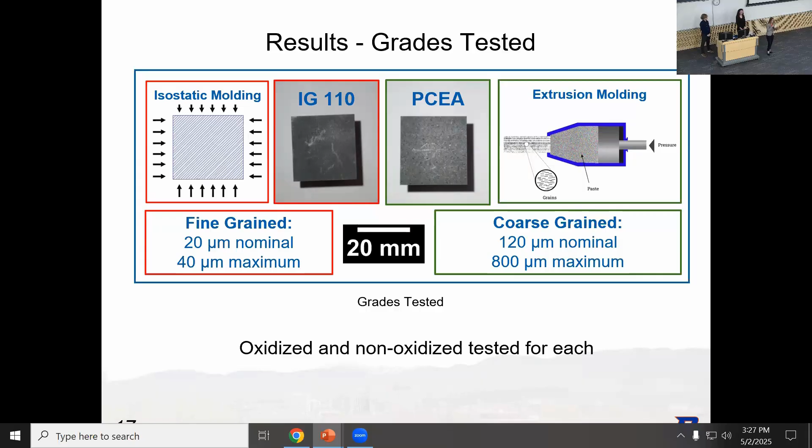Our results align with our hypothesis that the oxidized graphite would have higher emissivity. As Lauren mentioned earlier, the logic is that mass loss will produce coarsening in the sample that increases surface area for incident electromagnetic radiation. If not absorbed the first time, it can ping pong off of all those little curvatures until it's finally absorbed and re-emitted, thus leading to higher emissivity.

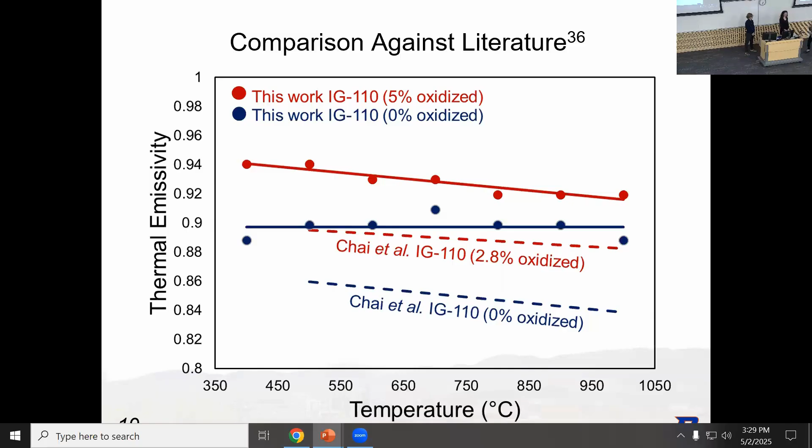Error analysis was very important to this project because measuring radiation is very sensitive. Our main source of error has to be the pyrometer, and there's a lot of reasons for this. You barely poke the thing and it fluctuates like 10 degrees Celsius. The best way to address that would be to stabilize our pyrometer, maybe get a more advanced one, and get it professionally calibrated due to manufacturer settings, which we were not able to do ourselves.

Noise in the environment always affects it as well. A lot of other studies, like the one we talked about earlier, were not done in a furnace like ours, so there might be slight errors with that.

Additionally, a source of error within the furnace could be the fact that we are going up to 1,000 degrees Celsius. We don't necessarily know how argon acts at lower temperatures versus very high temperatures, which could cause some differences in our setup. However, other experiments not done under the same gas still saw similar trends with emissivity, so there's lots of room for improvement in the future.

Additionally, there could be surface differences in our samples compared to other samples. We don't know, for example, how these specific graphite samples were fully formed, since that's proprietary information, and we don't know the exact raw materials, so it's difficult to compare.

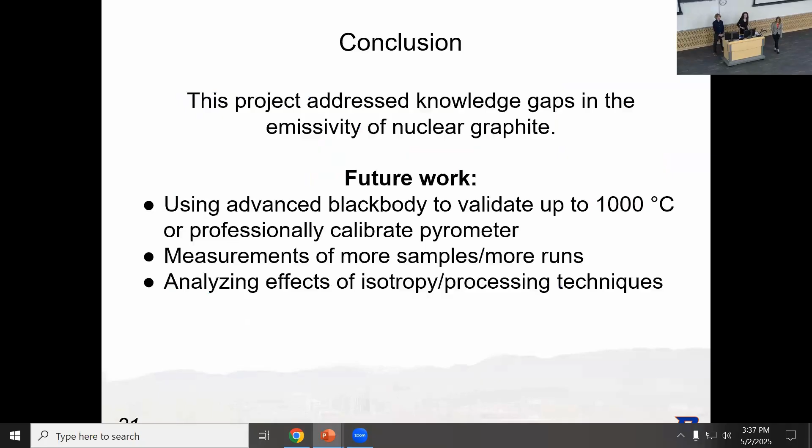You guys mentioned that you found the fine grained structure to have a higher emissivity than the larger grained one. Have you guys thought that might be due to a larger amount of grain boundaries with disordered bonds, stuff like that?

Yeah, we actually did have that exact discussion, but we then thought that it probably came down to the exact composition of the graphite playing a more dominant role than greater surface area from more grain boundaries. But yeah, we were kind of thinking along that line. I think one way to look into that in the future would be to do SEM images of the surface to really see what's going on there. I think that would be really cool. That was my thought on that.

Anyone else? I need the exercise, believe me. No, you do not. You look great.

Okay, so a question about the composition with SEM. How do you get composition out of SEM?

Just - I wasn't - yes, sorry. Yeah, EDS of course, but I was more meaning just like what does it look like? Is EDS a trustworthy tool to look at stuff like carbon and oxygen? No. Okay, no, we can't look at light elements with EDS.

Very good. Okay. But yeah, it would be really cool to see the roughness and stuff. Yeah, no, it's good. Yeah. All right, what help? Yep.